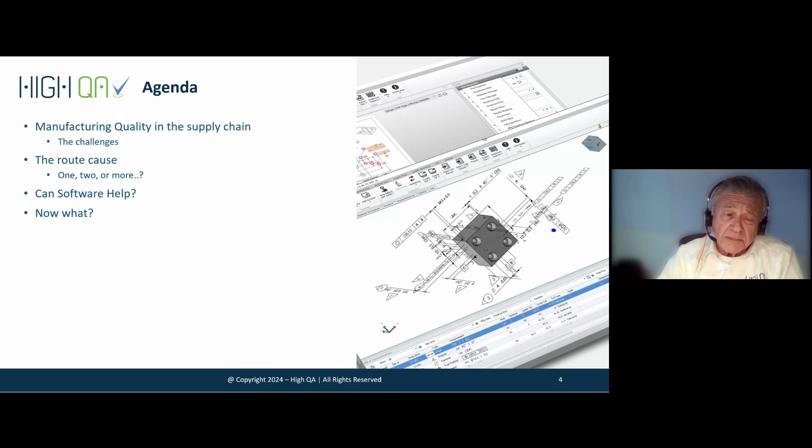I will take it a little bit further and talk about the agenda. So we are going to talk about the challenges in the manufacturing supply chain. We'll talk about root causes and how software can help. And then you can look into what can be done as a next step.

We'll start with a smile. When manufacturing actually started, it started many years ago in ancient times when this guy tried to build a wheel, but came another smarter guy who started manufacturing for his family or whatever neighborhood. And then from that point, he didn't need to do massive manufacturing or supply chain, but you can see how this stone will develop over time.

And over time means that it goes in parallel to the industrial revolution. So when he did it for himself, that's fine. But in the first industrial revolution, when steam was created and trains started to run on railroad, then you started to distribute it away from your village. And in the second industrial revolution, electricity was created and helped us build what we call the assembly line.

Then we get into supply chain, and then quality was created, and this guy started to add more people to his shop because we need to handle quality. And then came the third one, which is automation and robotics. And we are now in Industry 4.0, of course, handling all IoT and digitization of every step that we are doing.

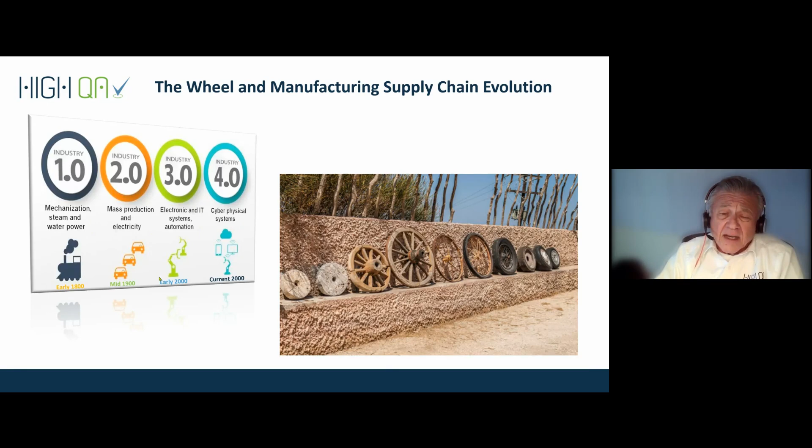With that said, we know that the critical dependency between OEM and manufacturer is super critical. Every OEM receives hundreds, thousands, or sometimes millions of parts to build a single product, across the entire line of products that he builds. These components are sourced from a network of manufacturers that serve as essential partners in the OEM supply chain. This interdependence between OEM and manufacturer is more than just a transactional relationship. It is a critical component to survival, growth, and future prospects in a highly competitive market.

Manufacturers depend on OEMs for consistent business, revenue, and innovation opportunities. On the other hand, OEMs rely heavily on manufacturers to deliver high quality parts on time, meeting both the specification and regulatory requirements. Any disruption of this partnership is going to cause delays in production and highly impact market access and success.

Therefore, fostering seamless collaboration and transparent communication between OEM and their manufacturer is critical, highly critical. Of course, the question is not whether it is needed, it is why we couldn't do it until today, and what is available today in order to make it happen.

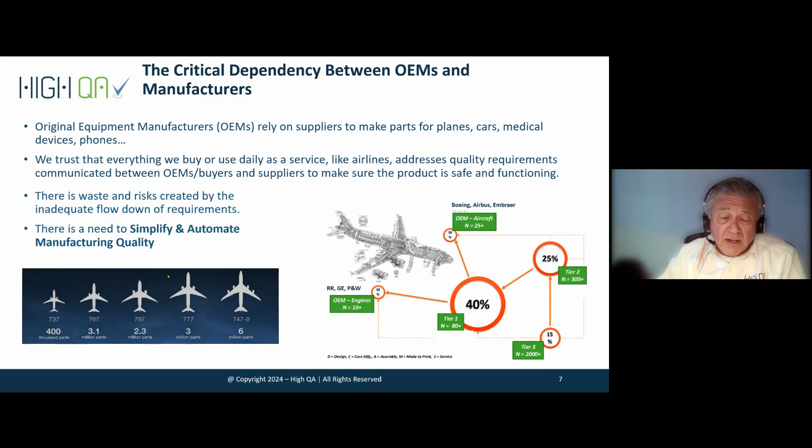And that's a huge complexity process. But let's take a little bit deeper look into it and see how many parts we actually have, in this case talking about the Boeing airplane. So the 737 has only 400,000, but when you go to the 747-8, they have 6 million parts. So the typical average number of parts per airplane is 3 million.

Approximately, as we said, 40% is manufactured, which equals 1.2 million manufactured components for aircraft. On average, about 2,000 airplanes are produced each year. That means the aerospace industry is responsible for manufacturing about 2.4 billion parts annually. This is only for new commercial airplanes. We can add other flying machines, maintenance, overhaul, retrofit, and the list is long.

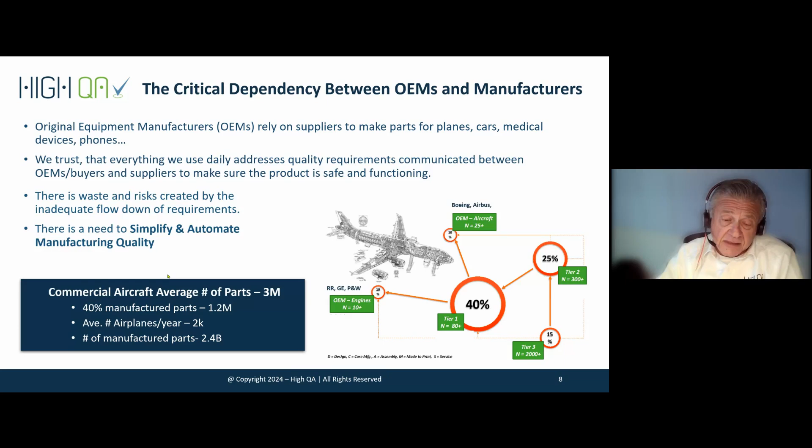Let's talk about the scale of the manufacturing industry. Now that we established the scale when we talk about airplanes, it won't surprise you that the average car you are driving has about 35,000 parts. You can add 20% for hybrid, another 15% for a more complex model.

To give you some context on the scale of manufacturing in the automotive industry, in 2023, 94 million cars were produced. If we assume that about 60% of these parts are manufactured, that's roughly 20,000 parts per car. Let's multiply it by 94 million cars, and we get to a huge number.

Now, when we look into this, we see that OEMs deliver millions of products daily, serving all industries - defense, aerospace, medical, automotive. Hundreds of thousands of manufacturers are producing millions of parts daily, billions of parts manufactured annually.

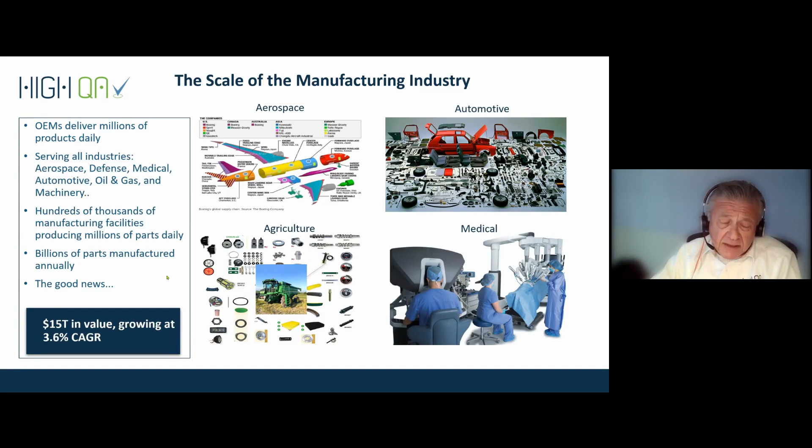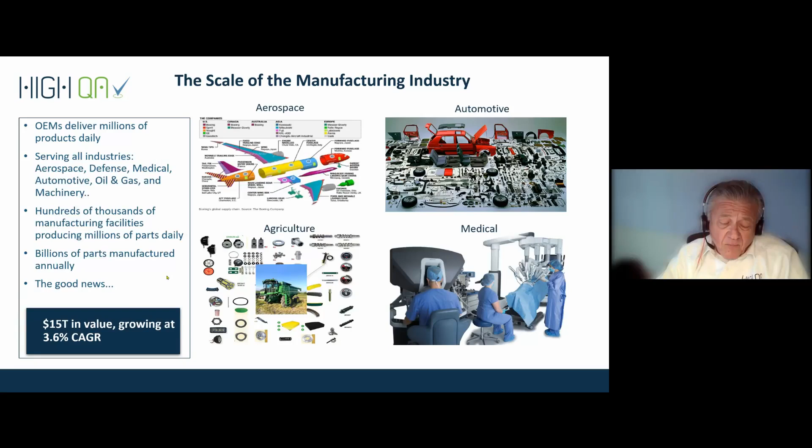And the good news is that this market, the manufacturing market, represents $15 trillion, and it's growing dramatically - 3.6% every year. Well, if we look into this, aerospace and automotive are the drivers of it.

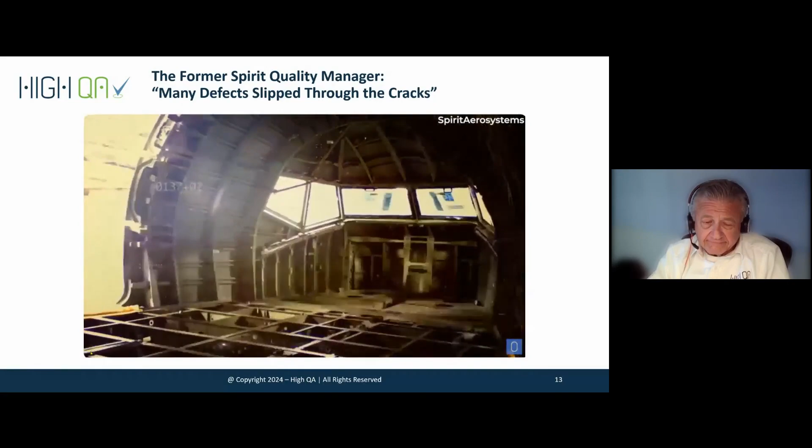This is a clip that's available to everyone on YouTube. I don't think I'm telling you something new, but you can read here: a former quality manager who worked at Spirit AeroSystems, a Tier 1 supplier for Boeing, has alleged that the culture at the company has allowed many defects to slip through the cracks, including the one that resulted in the Alaska Airlines mid-flight door plug blowout in January 2024.

So this is scary. As I mentioned, this is available on YouTube. It shouldn't happen, but it may continue to happen if we continue to use the same manufacturing quality method, relying on paper rather than on comprehensive digital processes across manufacturer, supplier, and OEM, which consists of a database driven between them in collaboration.

Another component that creates what I call a layer of disconnect between OEM and supply chain is what they call digital transformation. Large OEMs integrate more and more digital tools in their technology. And I mentioned earlier, talking about Industry 4.0, AI, IoT, digital thread, digital twin - a lot of acronyms.

Once they do it in their operation, they face a lot of challenges. They would like to ensure seamless digital integration across their supplier network. Not all suppliers may have the technological capability or resources to adopt this new system, and this will create larger gaps in visibility, coordination, and collaboration.

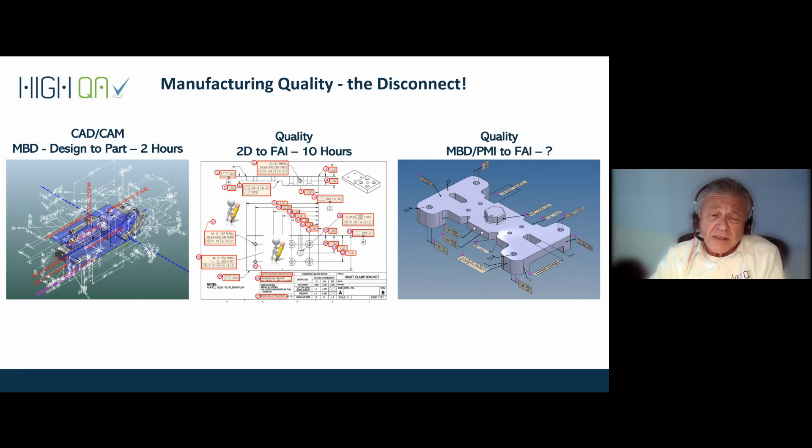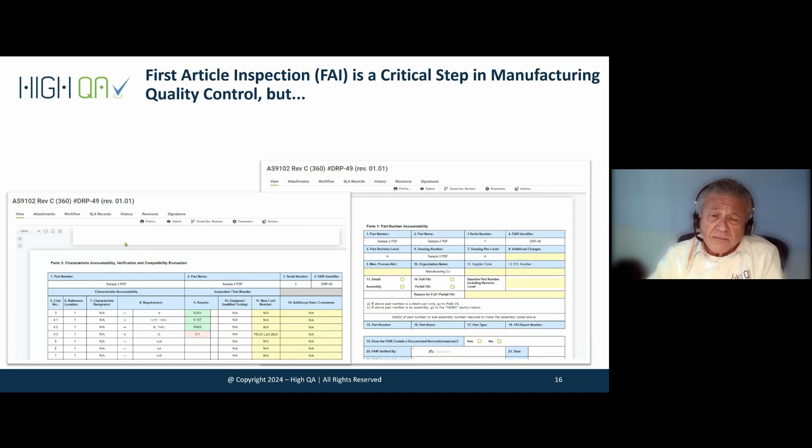So going back here about another component that is like a myth - that first article inspection is, of course, a critical step in manufacturing, but we all know that first article alone does not guarantee consistent production, and quality, of course.

So if you look into it, what are we trying to do when we get a part and provide the first article to our customer, OEM or tier one, and then it's followed by auditing after the FAI, the first article. Why do we need auditing after FAI? Because FAI does not guarantee that production will be consistent and stable.

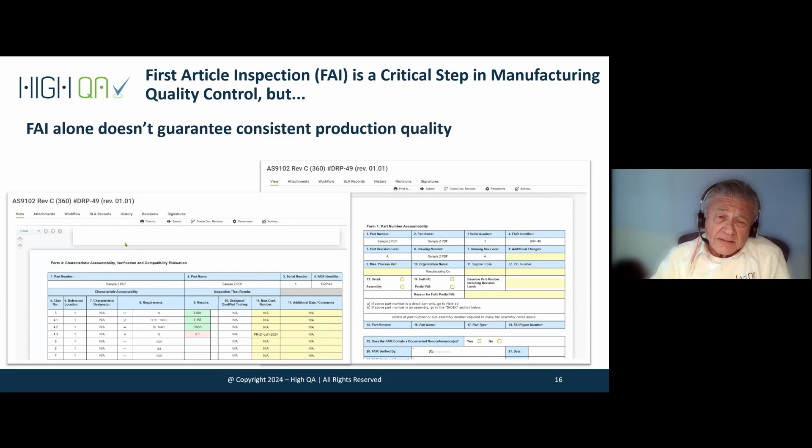And then we talked about another gap - what will guarantee consistent production quality. I left it open because when you talk with OEM, they want to reduce incoming inspection. So how in our world can we create production quality at the supplier side and at the same time reduce incoming inspection?

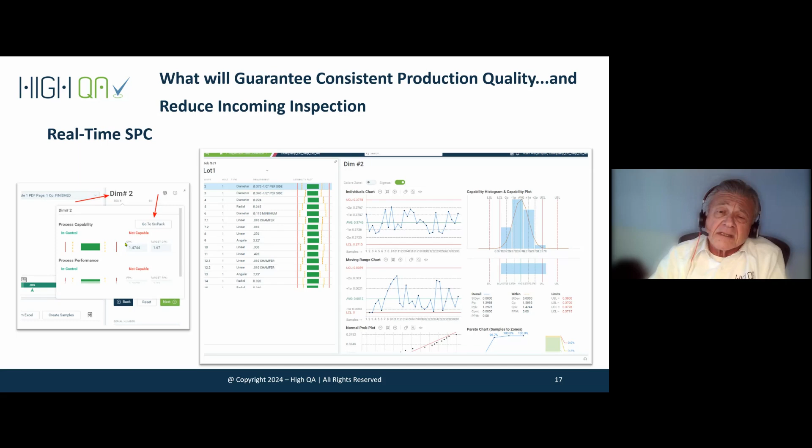So you said, well, we have to have SPC, statistical process control, on our production. Absolutely correct. But in our life today, SPC is done at the end of the process. I have a lot inspected, I upload it to my SPC, and I can see if I'm stable and consistent. But this is another disconnect - it's too late sometimes. When I run SPC, either as a supplier or as an OEM, that's not real time. We would like to have real time SPC.

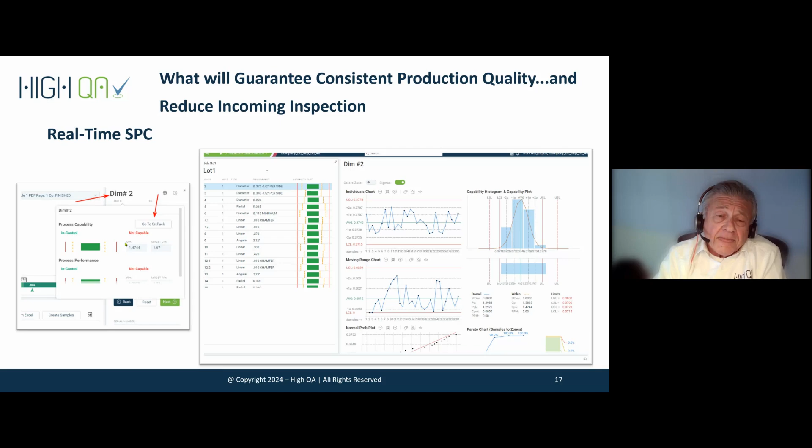So think about creating this CPK, PPK downstream, on the quality requirement, on the drawing or on the model. Then when I'm making the part as a supplier, I can see how stable or consistent it is, but also the OEM can know before you send the parts back that your production is stable and consistent. So there are multiple activities we do in the manufacturing process that are completely critical, required, but they are disconnected.

So what problem do we need to solve to get where we want to go? If we look into any manufacturing facility or OEM, there are many quality systems used by OEM or supply chain. They generate a common denominator of massive amounts of data in multiple formats, in subfolders and sub-subfolders, all over the place. But actually, you have a lot of data all over the place, and zero information when you need it.

We would like to talk about prevention. Manufacturing quality, either internally at the manufacturer or at the OEM, should not be about good parts or bad parts. We are talking about prevention - I don't want to get a bad part.

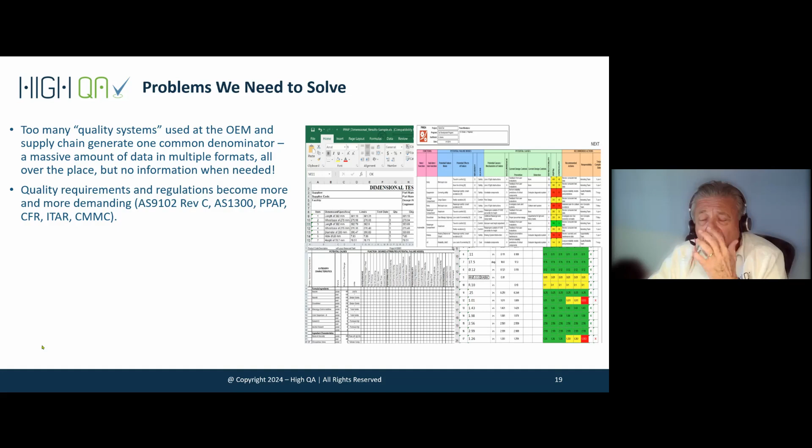The other component: quality requirements are aggressively growing - regulations, updates, all those documents, AS9102 Rev C, AS1300, PPAP, CFR, ITAR, CMMC - tons of documentation and paper you need to fill out and comply with. In manufacturing, growing 3.5% a year means I need to make more parts, I can buy another machine, put a robot in place, but I cannot get over documents.

And this requires tons of manpower to fill out documents, because today they're on paper - Excel, very massive Excel of course. That needs to go away. It should be integrated together with part making. It should be automated. Whatever I'm doing on the part level with PPAP, control plan, FMEA should propagate into the document level.

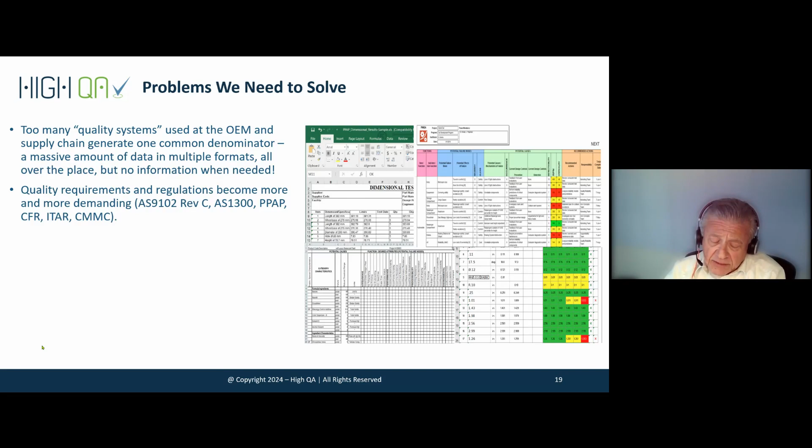Let's take another look - I changed the view of the slides to give another way of looking into it. I talked about this: more and more OEMs want to use 3D models instead of 2D prints.

The OEM doesn't understand - and I'm lecturing and training many OEMs on how to handle model-based definition with the supply chain. They think they're going to give you MBD, the native file, CATIA, STEP 242, or Creo or Siemens, and say, hey, you have the PMI, you have the model, you can make the part. Yes, you can make the part with this - we don't need it, we can use a STEP file to make a part. But when it comes to quality, we are talking about two different animals.

MBD, as I mentioned earlier, describes the part.

Quality is a process. You look into the model and say, oh, I need to do in-process inspection. I need to do roughing, semi-finished drilling, whatever it is. How do I do it here? I need to create FAI. How can I create FAI out of it?

The gap is huge. The OEM, in a way, has to solve the problem. It's a big gap, it should be solved. We solved it, but we may talk about that a little later.

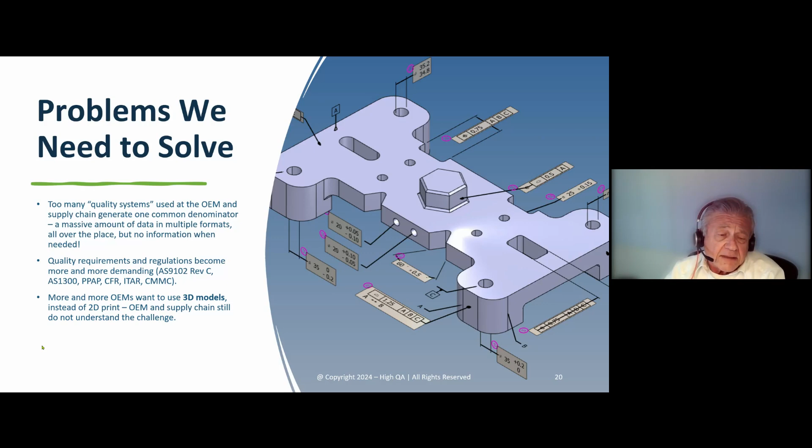And maybe a last point, if you look into measuring machines and tools, every day more and more inspection tools are added. They're not added just to have another inspection tool. You have to inspect the part, you have to report on it, wherever it goes. Anywhere you go, you can find tons of papers, and somebody takes the paper to quality, somebody clicks the data into the quality paper, and then somebody else puts it together and sends it to another guy to do FAI. It's endless. It's frustrating, it's tiring, and it requires a lot of resources to do it.

So going here and asking, how can software help?

If we look into how software can work, first of all, eliminate paper, spreadsheets, and what we call the antique file system, silos, paper, drawers, folder, subfolder, subfolder. It should be database driven, 100% revision control, because we have a lot of engineering changes. By the way, not just on the part level, we have engineering changes on the document level, PPAP.

So you would like to eliminate data re-entry. What does re-entry mean? I don't want redundant data in all kinds of papers. I do it once, it should be just once.

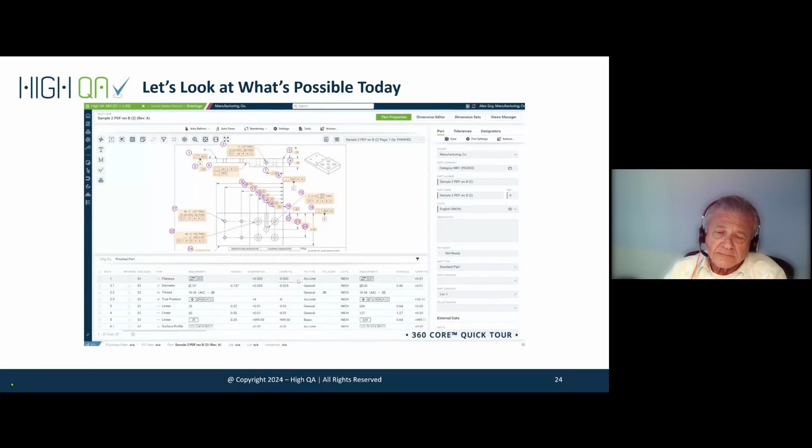Whether starting with a 3D model or a 2D drawing, you plan your quality with intentionality. With one click, you can automatically balloon and extract quality requirements. Add depth and detail to inspection plans in minutes by assigning gauge categories, criticality, SPC target metrics, and even assign operation steps.

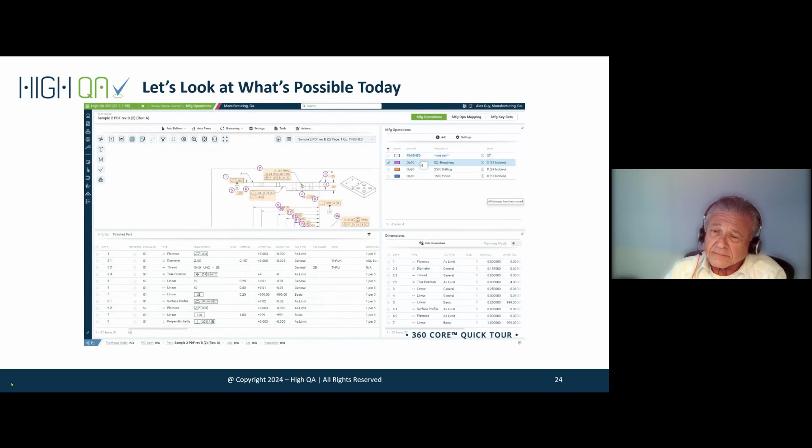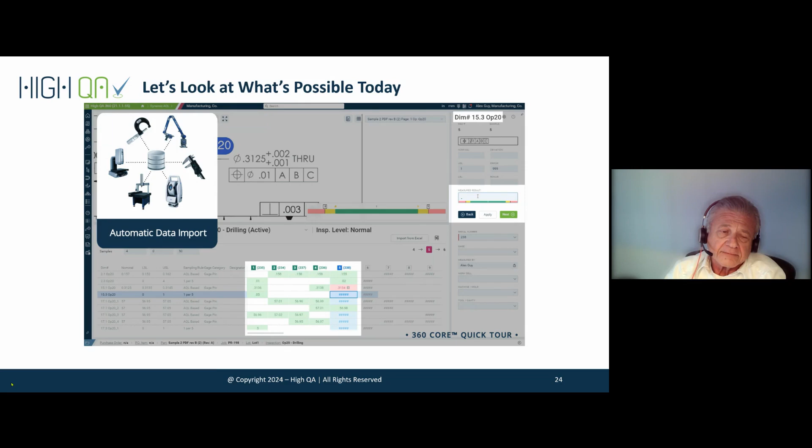With planning complete, inspectors simply scan a QR code to bring up their inspection plan and start recording their measurements. HQA 360 collects measurement data from any source, providing immediate feedback and SPC analytics to inspectors. With all your data in one secure and scalable database, generate any document you need to finalize your job, including FAI, PFMEA, Gauge R&R, SPC capability studies, and much more.

Document templates are customizable and interactive, so users can complete them in a live environment. What's more, every document is managed through our dynamic workflows, so you know the status of any document at any time. Now, looking back at our dashboard, we can see that we were able to approve and finalize all 5 FAIs, which we were assigned. We've cleared through our backlog in record time.

With HQA 360 taking care of your internal manufacturing, let's see how you can better manage your supply chain quality as well. HQA Hub is a supplier quality management software. It leverages HQA 360 so you can share, collaborate, manage, and monitor data with suppliers and customers from an all-in-one manufacturing-driven database with quality processes at the center.

Whether your suppliers already use HQA 360 or not, the experience is the same. Your quality requirements and part data are sent to them in real time, reducing interpretation. Suppliers can input measurements collected from any source, giving you visibility of production data as it occurs. They can complete submission documents so you can validate quality before parts ship. In this way, you are able to manage your suppliers collaboratively with full traceability and transparency.